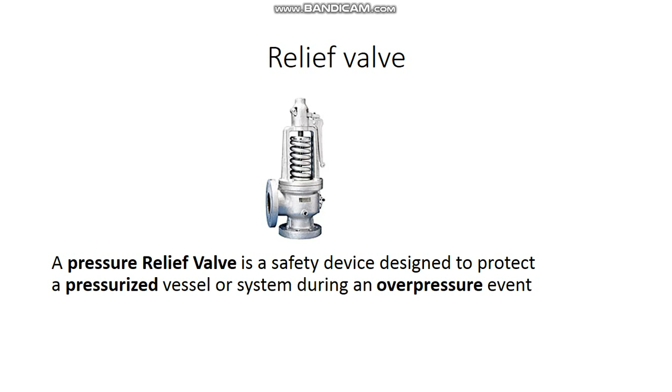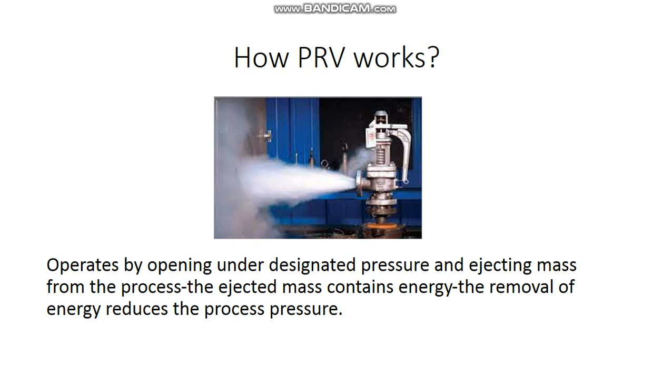So a relief valve is a safety device designed to protect a pressurized vessel or system during an overpressure event. How does a pressure relief valve work? A pressure relief valve works by opening at a designated pressure and ejecting mass from the process. The ejected mass contains energy. The removal of energy reduces the process pressure.

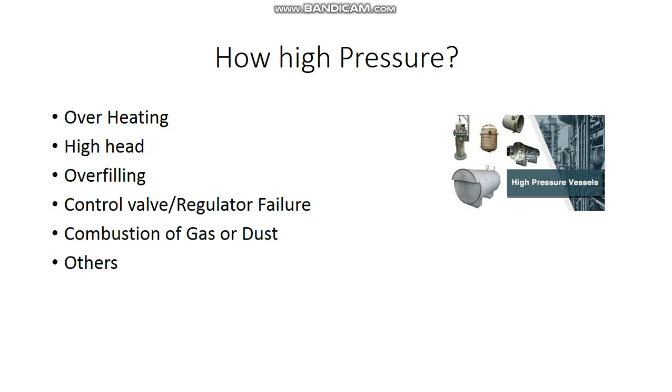How does high pressure happen? The reason can be overheating, high head, overfilling, control valve or regulator failure, combustion of gas or dust, or other reasons. Why a relief valve? Number one is safe operation. Number two, PRVs are installed at potentially hazardous points. Number three, high pressure vessels are protected per API RP 14C standards. Number one is shutdown action. Number two, mechanical devices. Number three, pressure safety valve or rupture disc.

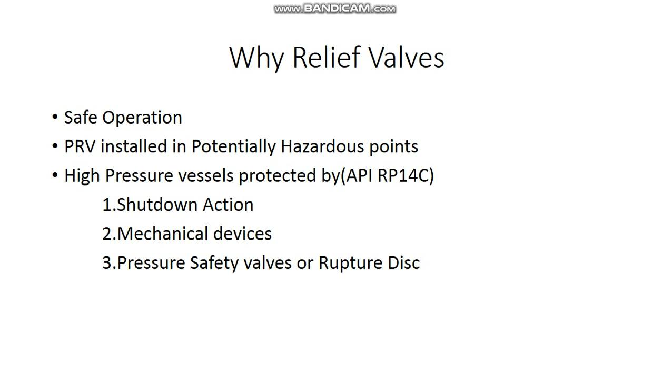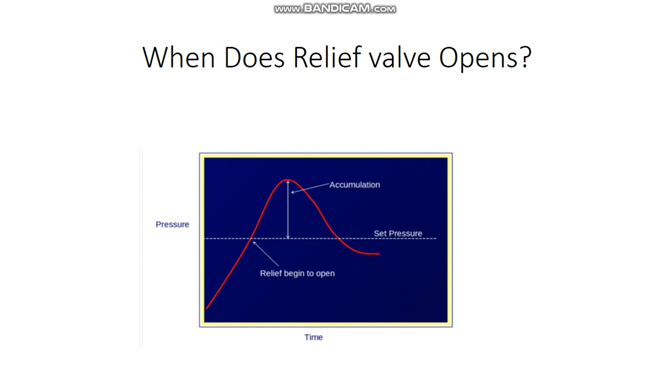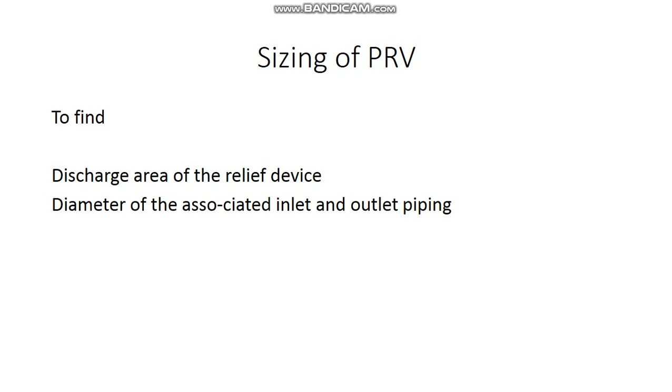So when does a relief valve open? When the pressure exceeds the set pressure, the relief valve opens. Sizing of PRV, what is the objective? Number one is to find the discharge area of the relief device. Number two, the diameter of the associated inlet and outlet piping.

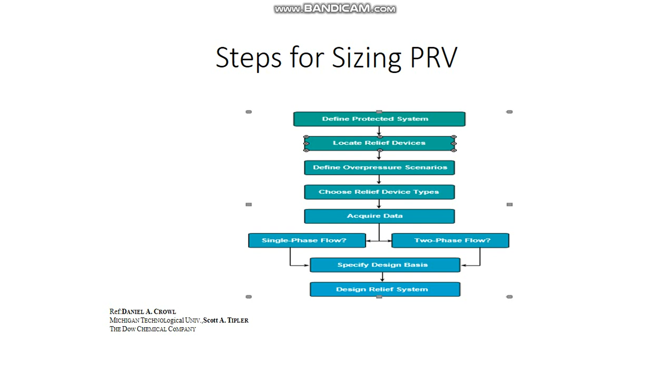What are the steps in the sizing of a PRV? Number one is define the protected system. Number two, locate relief devices. Then define the overpressure scenario. Choose the relief device type. Next, acquire data. Then we have two classifications: single phase flow or two phase flow. Then specify the design basis and finally design the relief system.

What are the PRV sizes? So PRV orifice size is designated by API code. It is indicated by letters D, E, F, G, H, J, K, L, M, N, P, Q, R, T. So this tabular column gives you an idea of the relief valve sizes.

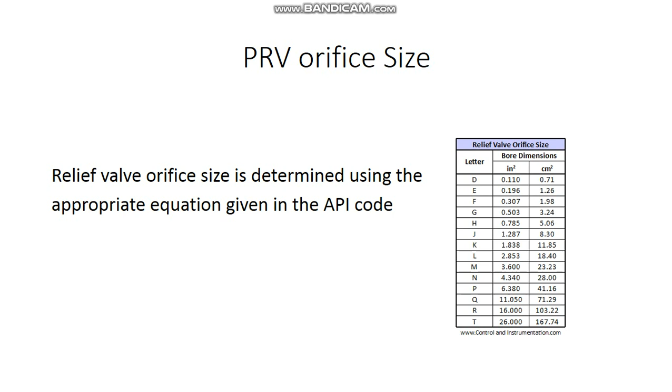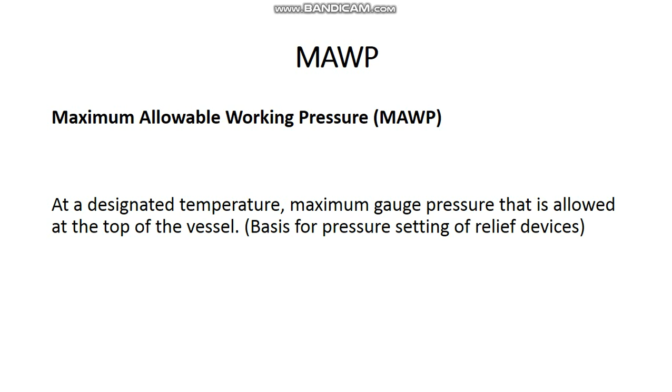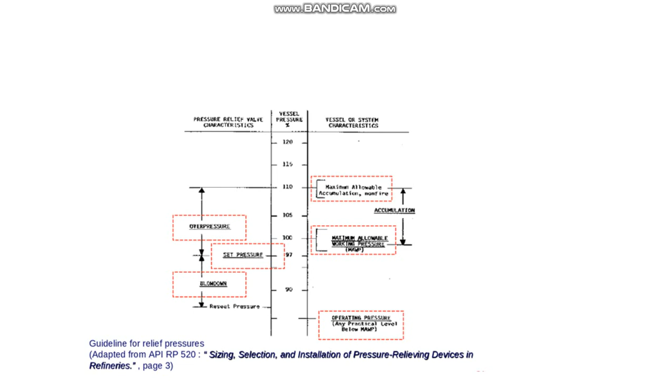What is maximum allowable working pressure? At the designated temperature, the maximum gauge pressure that is allowed at the top of the vessel, that is MAWP. So this picture gives you the graph between pressure relief valve characteristics and vessel or system characteristics. On the left side you see reset pressure, blowdown pressure, set pressure. Above set pressure it is overpressure. On the right side you see operating pressure, maximum allowable working pressure, MAWP. Above that, accumulation, maximum allowable accumulation.

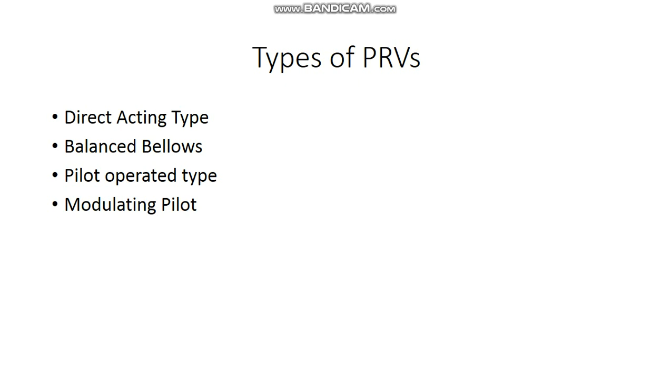Types of PRVs: direct acting type, balanced bellows, pilot operated, and modulating pilot. Types of relief valve. First is conventional. It is the most reliable type if properly sized and operated, versatile, can be used in many services, compatible with fouling or dirty service. The biggest disadvantage: relieving pressure is affected by back pressure. Susceptible to chatter if built-up back pressure is too high.

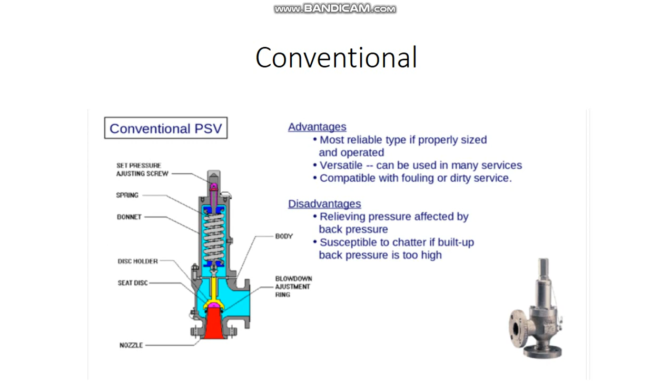Balanced bellows. Advantages: relief pressure not affected by back pressure, can handle high built-up back pressure, protects spring from corrosion, wide range of materials available and chemical compatibility. Disadvantages: bellows are susceptible to fatigue and rupture and may release flammable or toxic fluid to atmosphere, high maintenance cost.